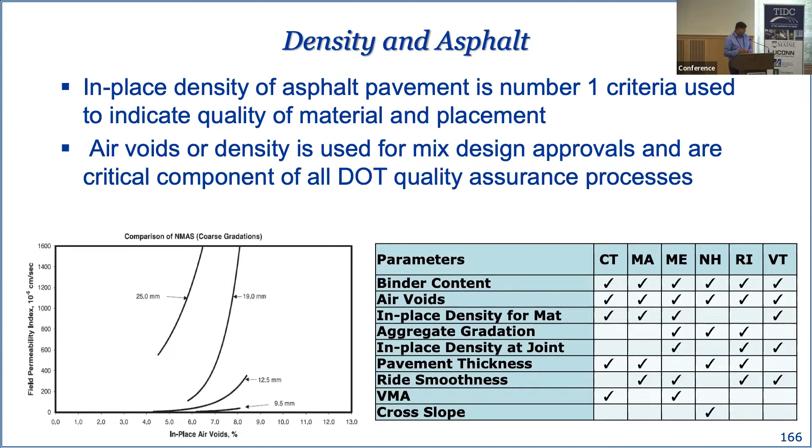So how do we measure the level of density or air voids in these asphalt pavements? At least, what's the current process? The current approach, at least in the field, is to oftentimes go and do coring, where you are actually taking out samples of asphalt mixtures from your pavement. And then you are bringing them into the lab and applying a basic gravimetric analysis. We use the dry weight, submerged weight, saturated surface dry weight. So it's a very standardized process, nothing unusual there, very simple physics principles. However, the challenge is you have to go out and actually take these specimens.

The alternative that has been developed and has matured very well in the last 20 years is nuclear density gauges. These are great devices. They are using a nuclear source and a receiver to try to relate to the density of that asphalt mat. However, the challenge is the word nuclear, which means they are regulated by nuclear entities. There's very specific training that's required for anyone who's using them. There has to be a custody requirement, so these can only be stored in certain places. Every lab has to have a dedicated space to store them, and everyone needs to be keeping track of that nuclear source and so on. So those are some of the challenges in the current practice.

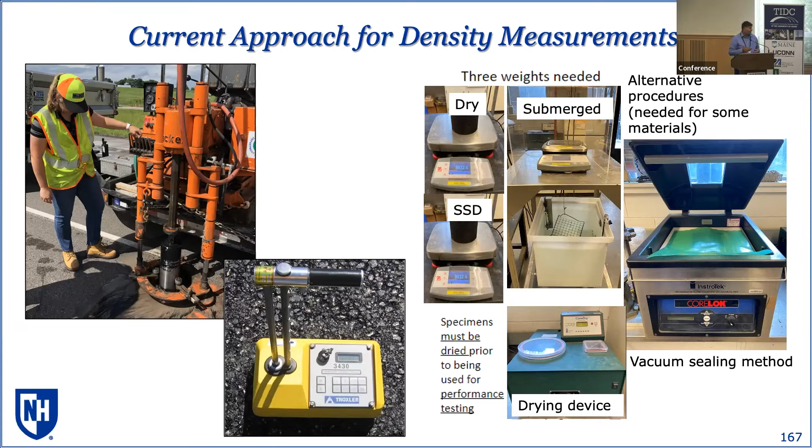You can only take so many cores, and if you try to make a Swiss cheese out of your pavement, no one's going to be happy. So they don't want you to take too many cores. And you need multiple pieces of equipment in lab as well. You have to have a temperature controlled water bath to do submerged weights. You have to have oftentimes a vacuum sealing based method, which has become quite standard in the asphalt industry. So there are challenges with the current approach.

And that's where the research or the technology or the innovation comes into play. And I can take no credit for development of this technology. This has already been developed through efforts of previous researchers. But that's the dielectric measurement method, which is really the same technology as ground penetrating radar, which is very commonly used for pavements as well as geotechnical applications.

You really are shooting electromagnetic waves into your pavements or into your bridges or even soil. And you are really looking at those velocities and reflections, generating a plot similar to an example that you can see there from the MnROAD facility in Minnesota, where those reflections can tell you a lot about thicknesses of layers, if there are delaminations between the layers, if there's any moisture present within or between the layers.

The idea behind what you see in this presentation is to take that same technology, miniaturize it, and also make it more suitable as a quality control or quality assurance tool. And that's done with the development of what's now referred to as the density or dielectric profiling system.

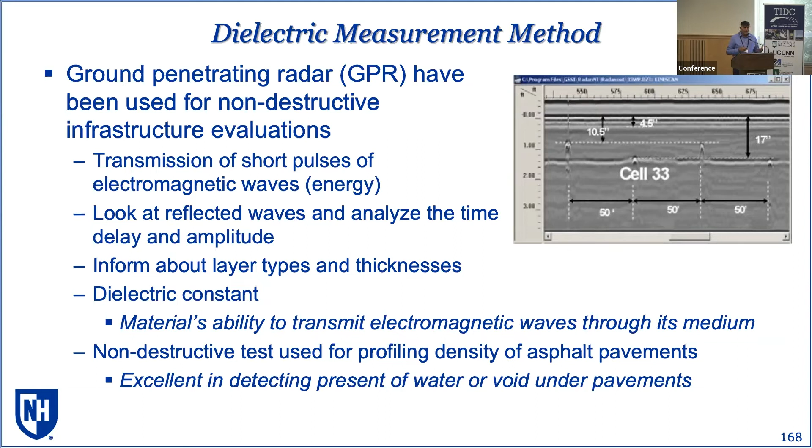Why does this method work? Because what you are measuring through this is a dielectric constant. Every material has a dielectric constant. Water has a significantly different, higher dielectric constant, and that's why microwaves work, right? When you put stuff into a microwave, if it has a higher amount of moisture, it heats up faster. Air has a significantly different dielectric constant than solids. And so since we are interested in air voids or density of asphalt mixture, we can utilize this measurement of dielectric constant as a way to determine the in-place density of our asphalt pavement.

So the change that we are looking at is really, instead of having to take these destructive core samples or use a non-destructive technique that still only works in a spot checking manner, convert to more of a complete coverage approach. And you see a device that was initially developed through a SHRP 2 effort and then matured by a company. And now there's a pooled fund led by Minnesota Department of Transportation into this density profiling system. And I believe our third speaker will also talk a little bit more about it.

You can see an example of that in North Dakota, where it's been run over a pavement. And what you see there, 3 different bands, is actually not 3 different antennas, but 3 different lanes that have been constructed side by side. And you can really see right off the bat that there's something going on at specific places, right? Wherever you see significant changes in the dielectric values, that means that you have either very high or very low density spots that have occurred as a result of your construction practices.

Now, if you had relied on your original method, there's a chance that you may not actually end up taking cores at those places, and you would never know about these non-uniform locations within your construction. And this is much, much faster than either of these 2 processes. Literally, you can do a 1,000-foot section and completely scan it in a matter of minutes, as opposed to taking several minutes just to get 1 core with the current approach.

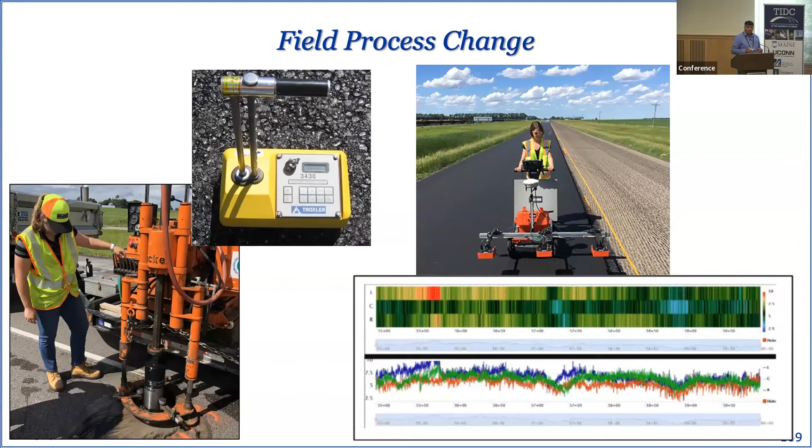There's also a similar change on the lab side of things, where once again, we can replace our standard AASHTO process that requires a specific gravity bench, which means you have a scale with a suspension system that you can use to get submerged weights, and oftentimes the vacuum sealing method to get your densities. That all can be replaced by this simple single piece of equipment, very small, that can be easily set up in the construction trailers brought to site to easily take the measurement. Same technology, but now instead of measuring in situ density, we are measuring density of these specimens in lab.

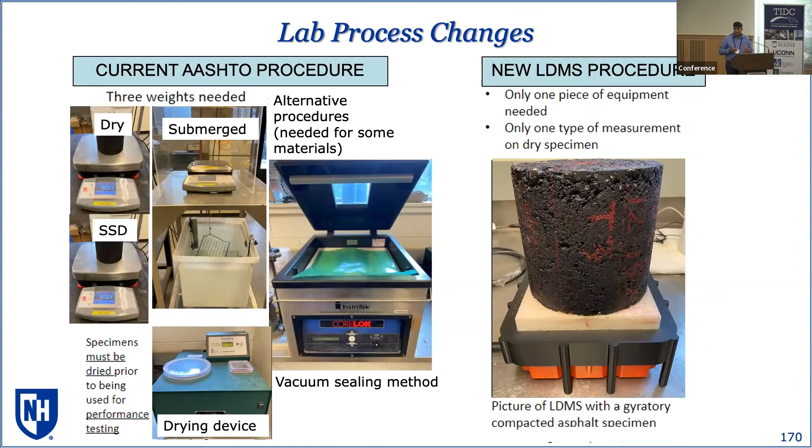So there are two different efforts that we are working on right now. One is an IDEA project sponsored by the National Cooperative Highway Research Program. And what that project focuses on is how do we take this existing technology and write a standard AASHTO specification that agencies can then adopt and put into practice. And along the way, we are also developing some machine learning based models, because what we are measuring in lab is a dielectric constant, and we need to have the ability to go from that to density.

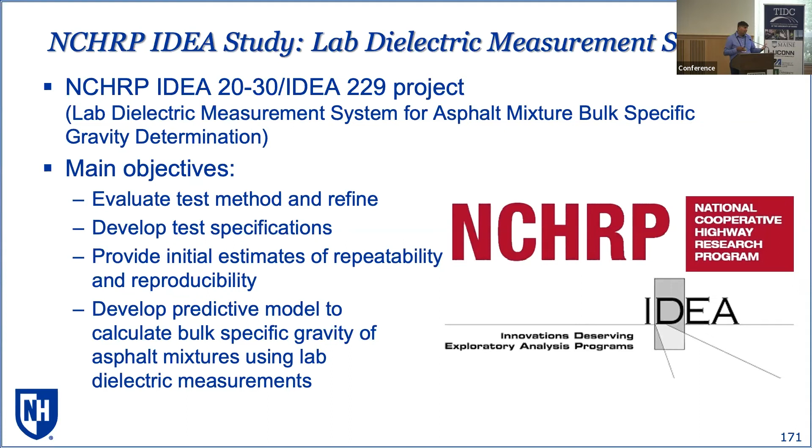We can always do some calibration curves, but we are trying to get to the point where we don't have to do those calibration curves. For this effort, we actually sampled materials from 9 different states, and what dictated these states is really the geology of aggregate, because each aggregate type has different dielectric constants. So we really tried to go after broad enough geological sources. We did have quite a bit of material just from New England because that's where we are located, but we are really capturing representative materials across the country.

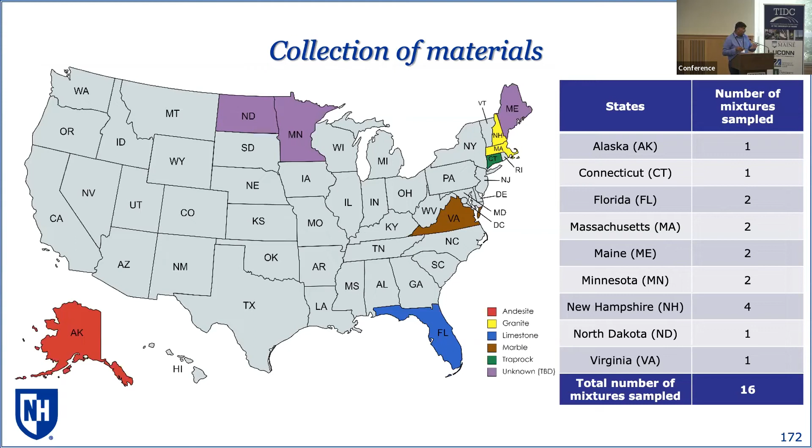And the study itself, to finalize the specification, we are using more of the standard specimens that typically are used in asphalt mix designs and acceptance processes. However, we are also looking at variations. What happens if you use shorter samples? What happens if your samples have as-compacted faces versus cut faces? Because oftentimes our lab test specimens are chopped out of longer cores. And how does that impact our dielectric measurement?

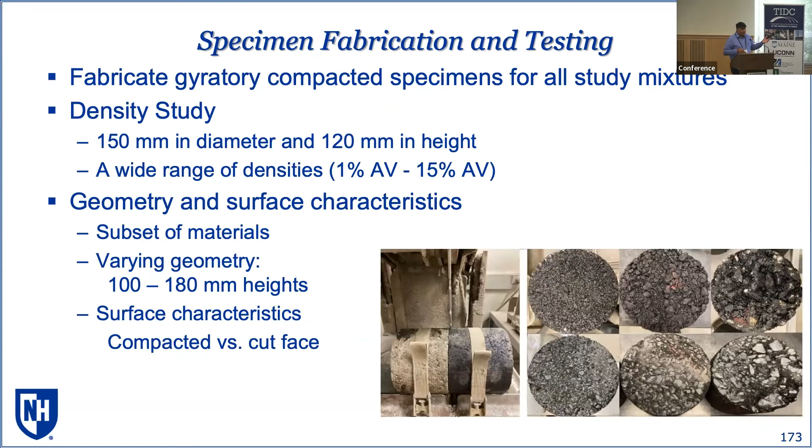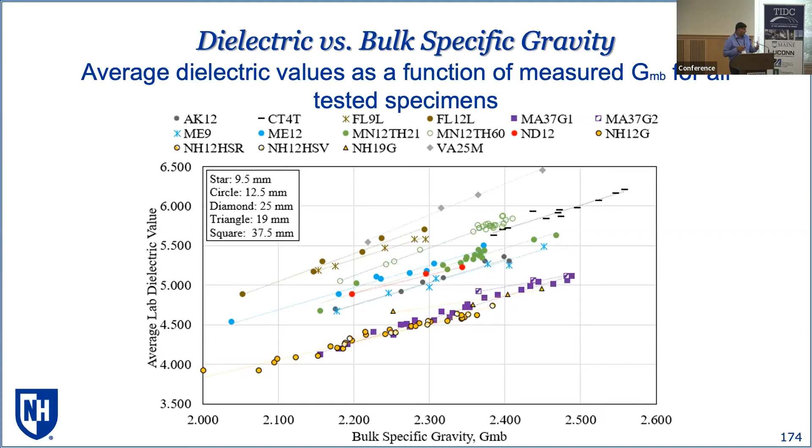That's just a snapshot of the master data. If we gather all the data that we have collected or measured in our lab so far, some interesting things: you can see that these are mixtures coming from New Hampshire and Massachusetts, from as small as 9.5 millimeter nominal max sizes to 37.5 millimeter. But that aggregate geology is so predominant that irrespective of these mix sizes, they are still following the same trends. And then you can also see, as you look at different types, like marble from Virginia, much higher dielectric values, or trap rock from Connecticut, which has much higher densities. You can see it takes its own trajectory.

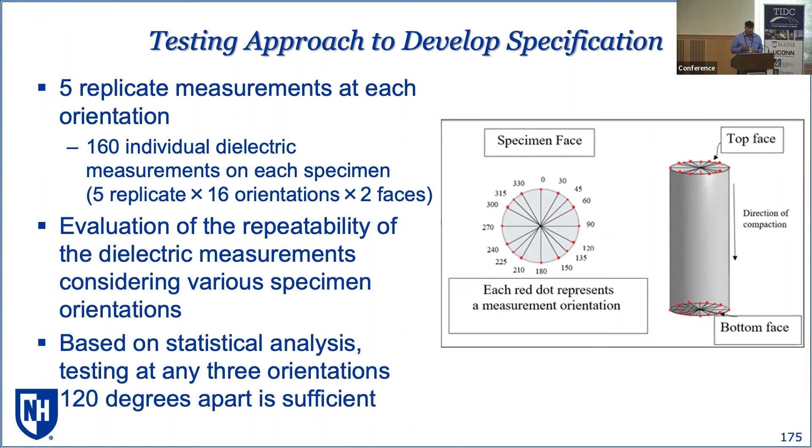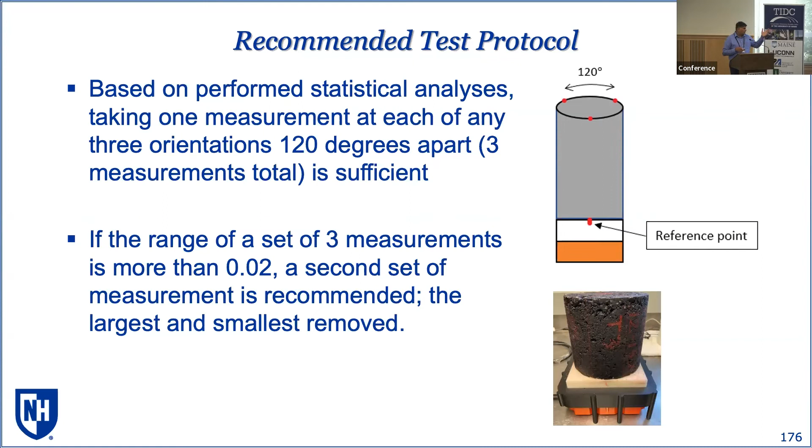So in terms of implementation, we did quite an extensive amount of testing with all this material, to the level where many of these samples we tested 160 times for dielectric measurements in order to develop a procedure that's statistically sound. And what came out of that is a process that has repeatability and reproducibility that would actually be lower than the current density measurement method that AASHTO uses with the specific gravity bench. That means that for each specimen, we are really taking measurements only 3 times at 3 different orientations. And that's really the outcome. We developed a draft specification language. It's submitted to IDEA, and now we are working on the other aspects of that project.

I'm out of time or 2 minutes, perfect.

So the second project is actually a subcontract to us through the Minnesota Department of Transportation, and it's a pooled fund that has many state entities involved in it, including Maine DOT here. And our contribution to that is really developing a tool that goes together with that density profiling system that allows users to take all the data generated from the density profiling system and process it, run basic statistics on it, and also answer some specific questions. For example, there are 3 different sensors on that machine. Are all of those sensors in agreement with each other or not? Or is there a specific bias with one of those sensors?

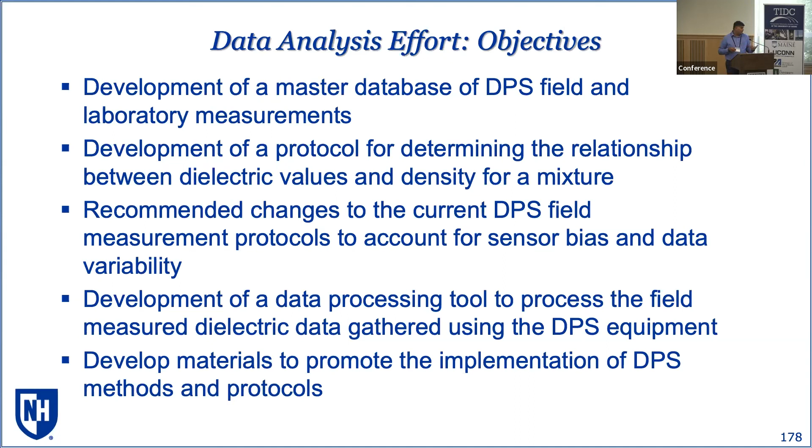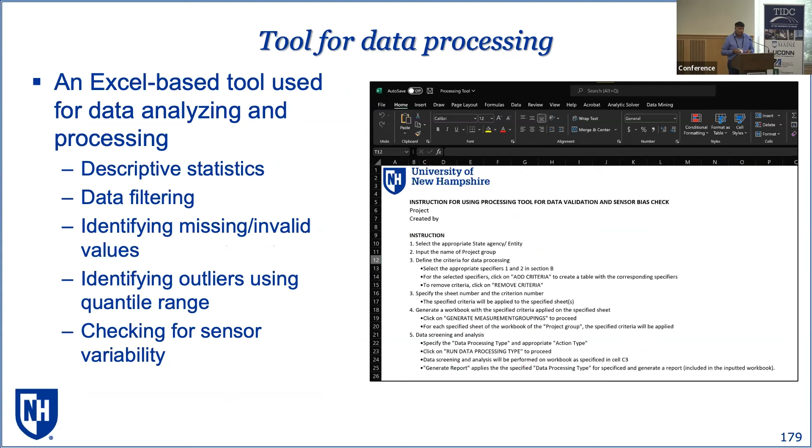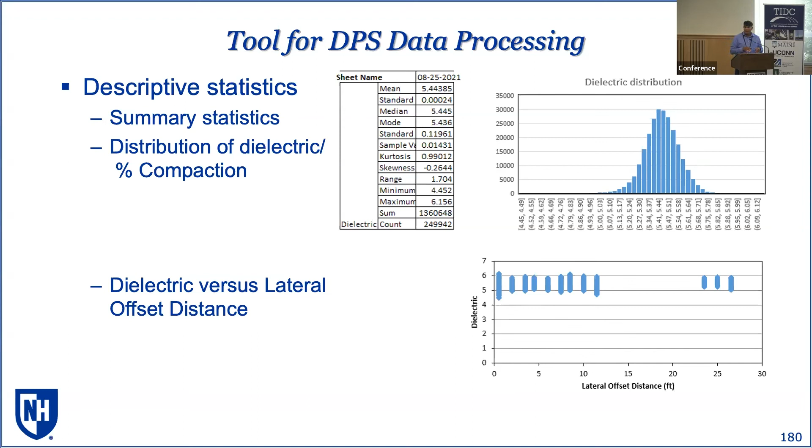So we already developed the beta version of that tool, and in coming weeks we are going to have a demonstration with a select number of the pooled fund partners, work with them to improve the tool, and really the outcome of this will be something that will go together with the pooled fund effort that agencies can then take and put into practice. But just as an example, it does your basic statistical testing and analysis; it also allows you to look at what happens with respect to your densities on the mat itself versus near the joints, because joints are oftentimes low density areas. And so you really want to make sure that those joints are getting a significant amount of compaction effort.

And then, as I mentioned, as part of this tool, we also have functionality that detects the bias. If there is a bias between those three sensors, it automatically detects it, and then the user has the ability to not consider data from that one sensor. Or one thing that we are now looking at is, if it's a uniform shift that we always have, can we correct for that shift?

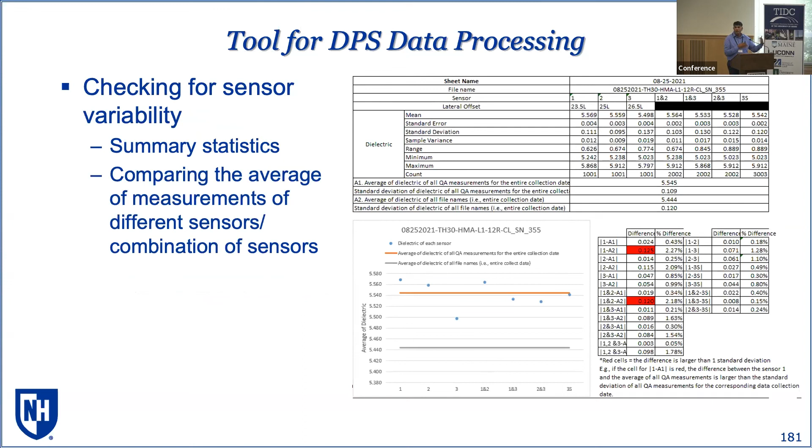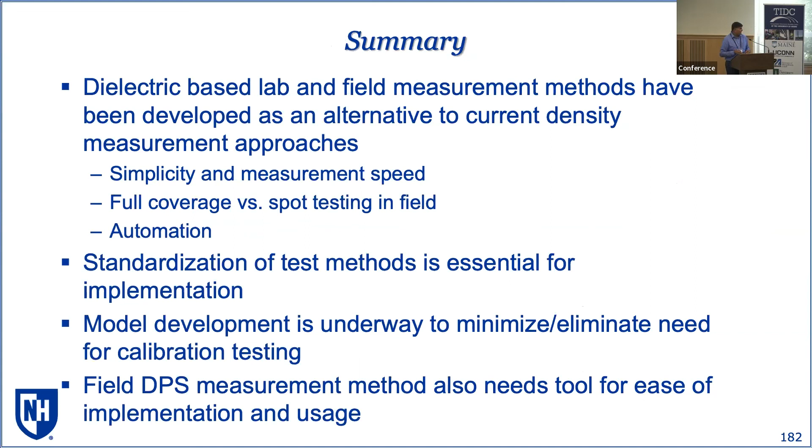So in summary, we have been working on these dielectric lab and field measurement systems as a way to replace or supplement existing practice, because it allows us to have full coverage as opposed to spot coverage of density. It's faster, it requires less equipment, especially for field applications. It's something that makes things much simpler. Standardization is important, and that's the aspect that we have been working on, and also tools that can go together with these innovations so that they can be put into practice. So that's my presentation, and I'll be happy to discuss more in the Q&A portion.